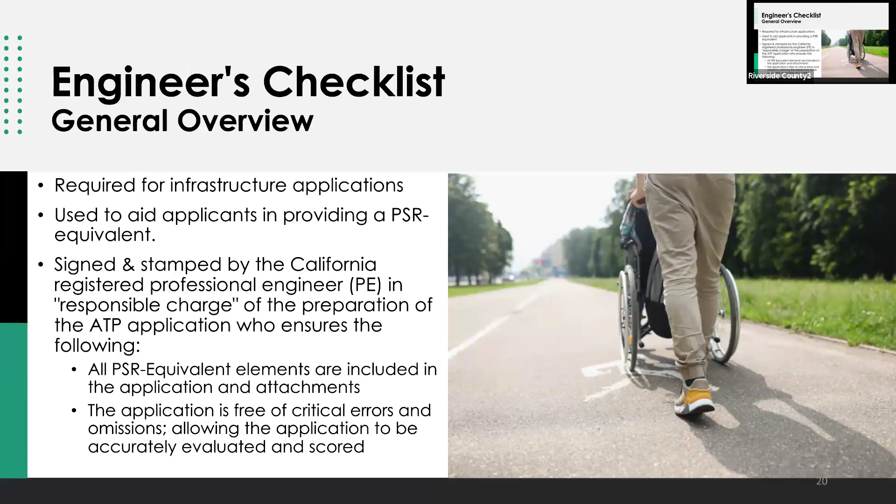The checklist verifies that the application includes all PSR equivalent documents in the infrastructure application. It also helps applicants prepare a complete PSR equivalent submittal. The documents must be signed and stamped by a California registered engineer. The checklist ensures that all PSR equivalent elements are included and the application is free of critical errors and omissions, and the reviewers can score the project accurately without missing information. Next slide, please.

The PE should verify the following information is correct and consistent: 1, the project location map; 2, the project layout plan; 3, the cross-section; 4, the project estimate; 5, the crash and safety data and countermeasures; 6, the project schedule, funding, and programming requests; 7, the warrant study and guidance; and then lastly, additional narrative and documents if provided. Next slide, please.

Okay, the project location map is the first PSR equivalent document reviewers see and helps them understand the project. Let's review a couple examples of project location maps. Next slide, please.

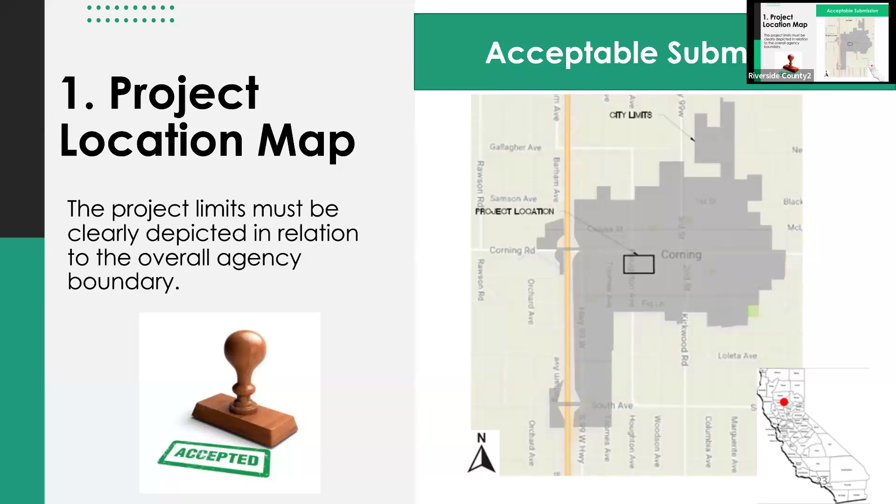This is an example of a legible map showing the project limits of an applicant's jurisdiction. The map does not include unnecessary information. If landmarks were needed for this map, this would be a good location to show those landmarks for reference of the project to, say, the capital of a city or county. Next slide, please.

Here's an example of a project location map showing the project corridor and the overall alignment. The important boundaries and landmarks are displayed in this map. No unnecessary details are shown here. You can see a reference of the location to major cities. Next slide, please.

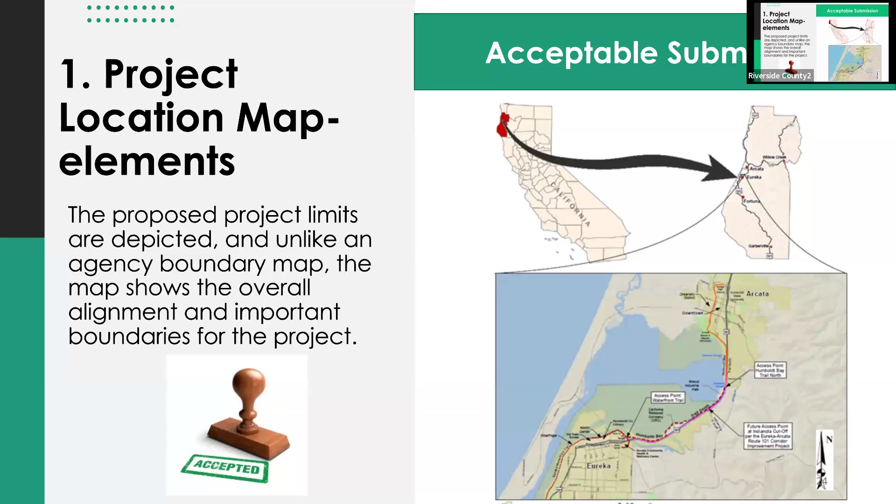This is a clear example showing the work and reference lines and a project alignment. Reviewers can easily see that this project is located on state US 101, and the project is located within the state right of way. Next slide, please.

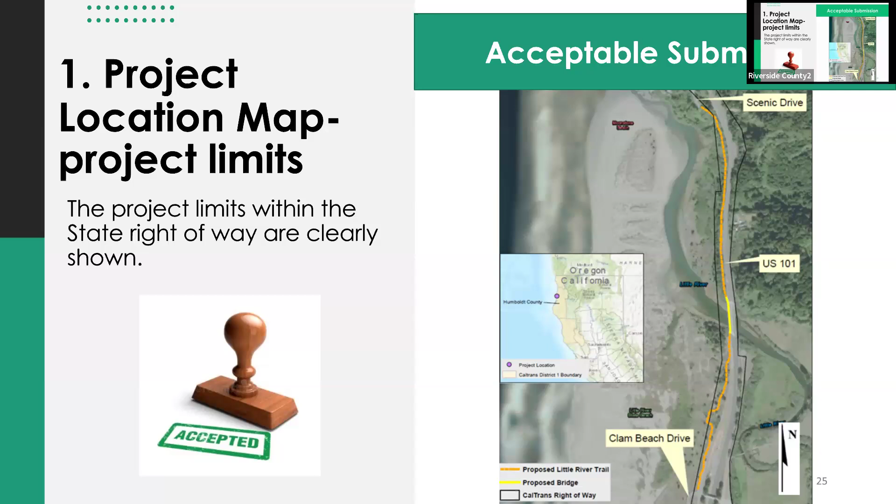In this example, this map fails because it's cluttered, complex, and does not clearly define the boundaries. It just shows a lot of lines, and the legend is crowded with a lot of unnecessary information in reference to the project. Reviewers cannot easily identify where the project is located and the scope of the project. Next slide, please.

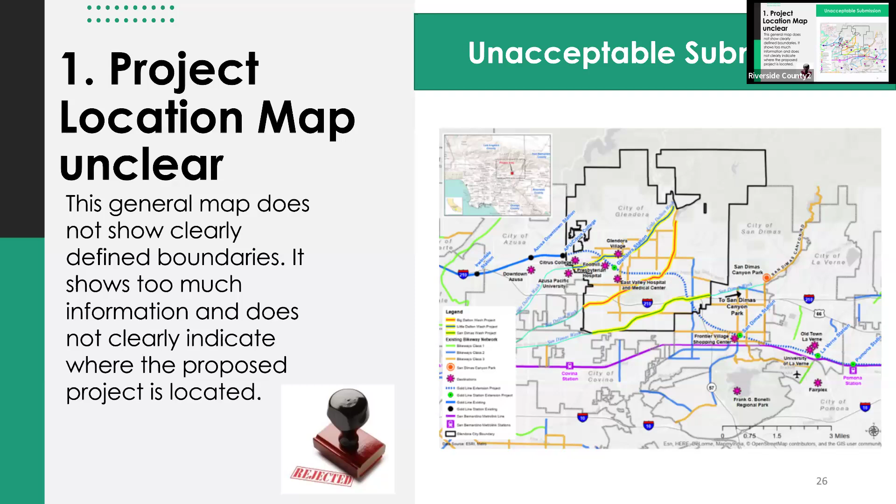Quick tips for creating acceptable project location maps: use clear, unblurry maps, always show project limits and a legend if needed, use simple line weights, avoid cluttered and unnecessary information. The project map should help reviewers better understand the application—back to what Teresa said, that the application include the narrative and the PSR equivalent documents. Next slide, please.

A project layout, a plan, tells reviewers exactly what the project is. Next slide, please. Using the plan alone, evaluators should be able to understand the full scope of work. If you cannot, the rule of thumb is: if you cannot understand the scope, we cannot either. Next slide, please.

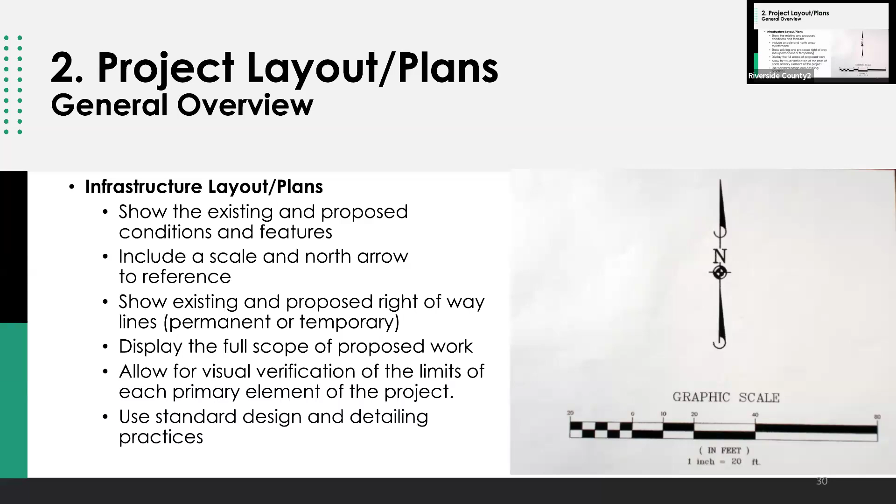The layouts and plans must show the existing and proposed conditions, include a scale and north arrow, clearly depict existing and proposed right-of-ways, display the full scope of work, help define the limits of the primary elements, and use standard design and detailing practices. Next slide, please.

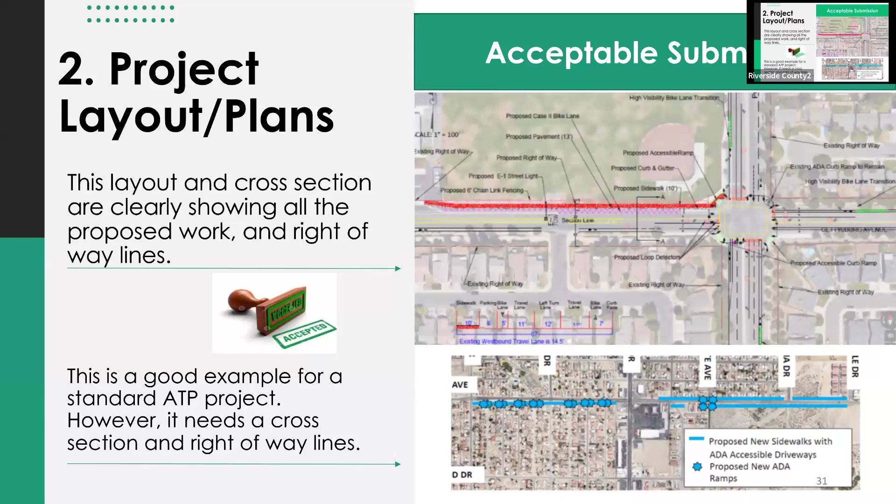This example clearly shows the alignment, cross-section, and right-of-way of a project. It demonstrates a typical layout for an ATP project and includes the appropriate level of detail. The example at the bottom is a good example, but you just need cross-sections and right-of-way lines to clearly depict the improvements for that project. Next slide, please.

Okay, the plan here shows a precise location of this project and how the proposed improvements fit within the right-of-way limits, and clearly displays the state right-of-way. This is important to inform the reviewer and Caltrans staff that a state highway impact assessment form is necessary for this project.

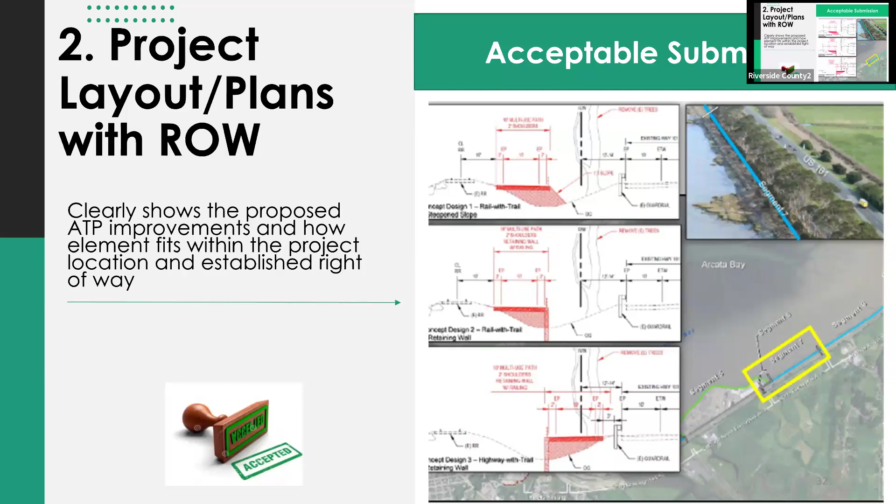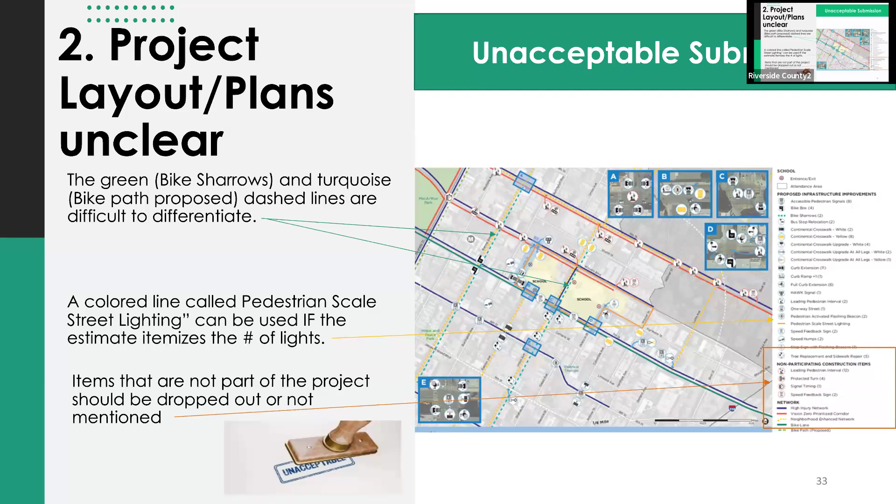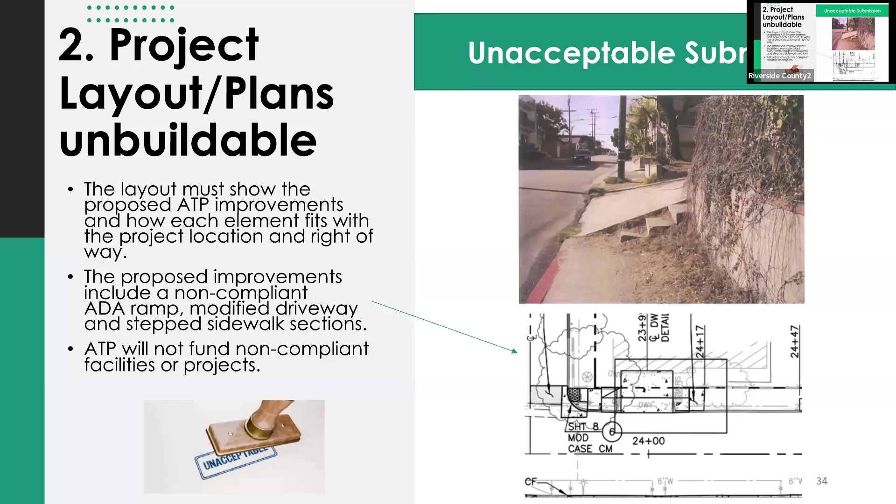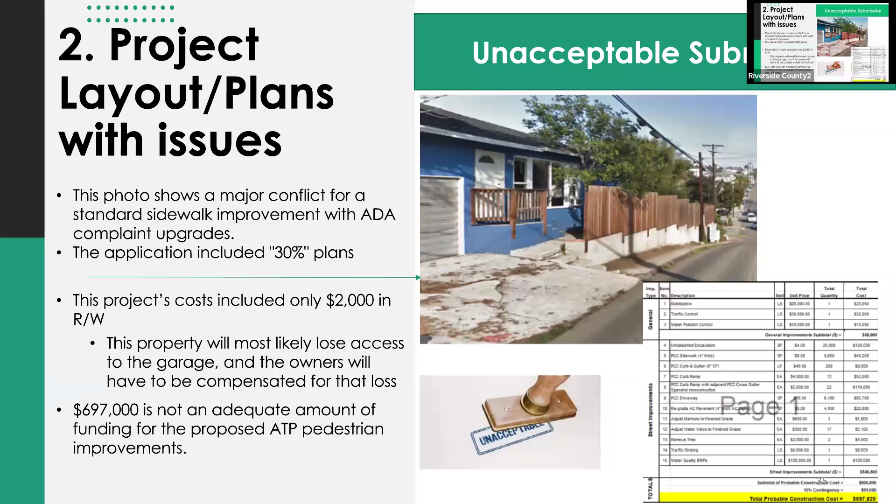So they have $697,000 for this project, and given that the loss of garage access will probably be quite expensive, the estimate is probably pretty low for the actual proposed project.

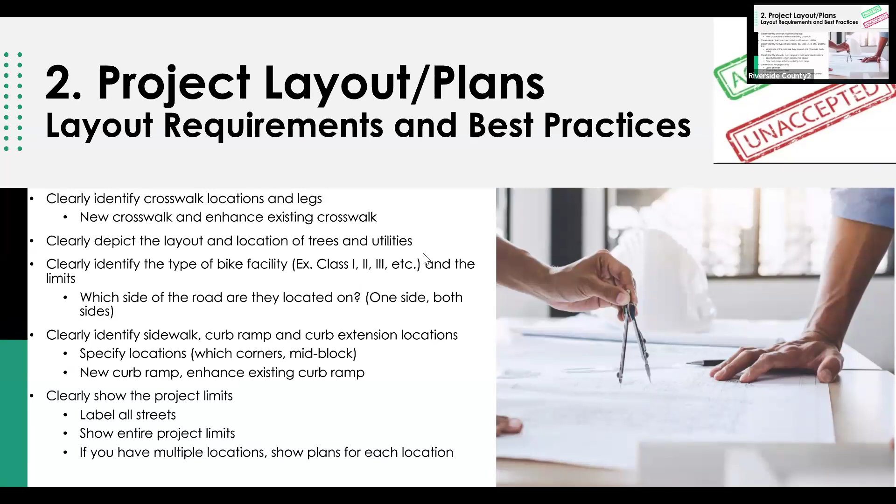Best practices for creating a project layout and plan: clearly label crosswalks and ramp locations, show improvements clearly with consistent symbols, identify the side of the road where improvements occur, display right-of-way lines and any required acquisitions, label streets and utilities when relevant, and provide layouts for each location if multiple segments exist.

Now I'll cover the cross-section requirements. Cross-sections should show improvements and how they fit into the existing corridor. They are essential for feasibility, constructability, and enhance the reviewer's understanding of the proposed project.

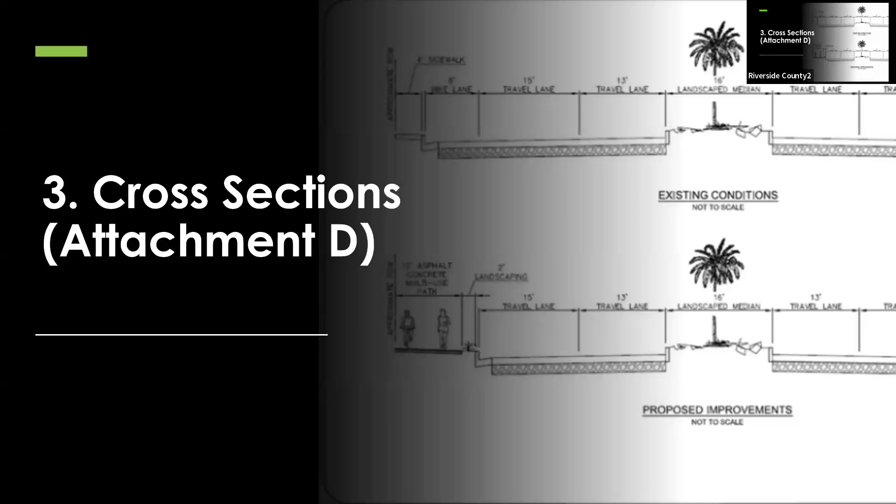Cross-sections must show existing and proposed conditions, match the width shown in the layout and plans, include traffic lanes, shoulders, buffers, and sidewalk widths. Also show side slopes, drainage, and right-of-way considerations, and reflect real field conditions and constraints. They must also depict material depths of the proposed improvements if there are sectional changes throughout the layout.

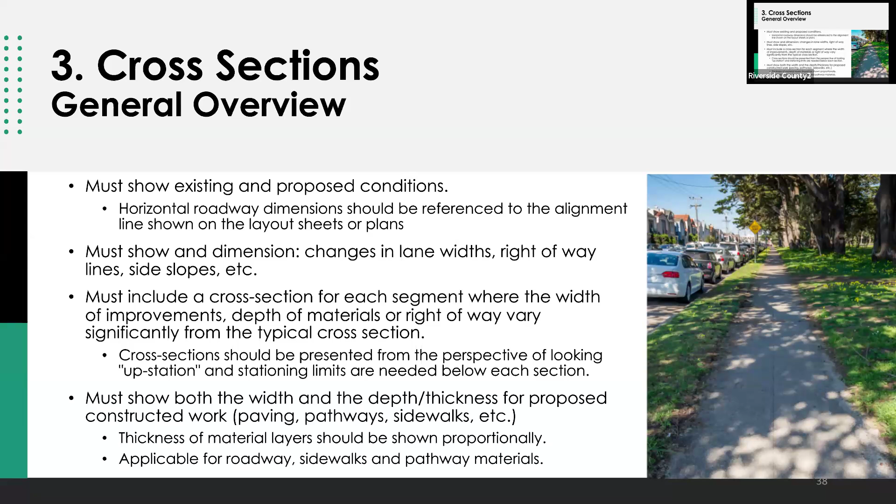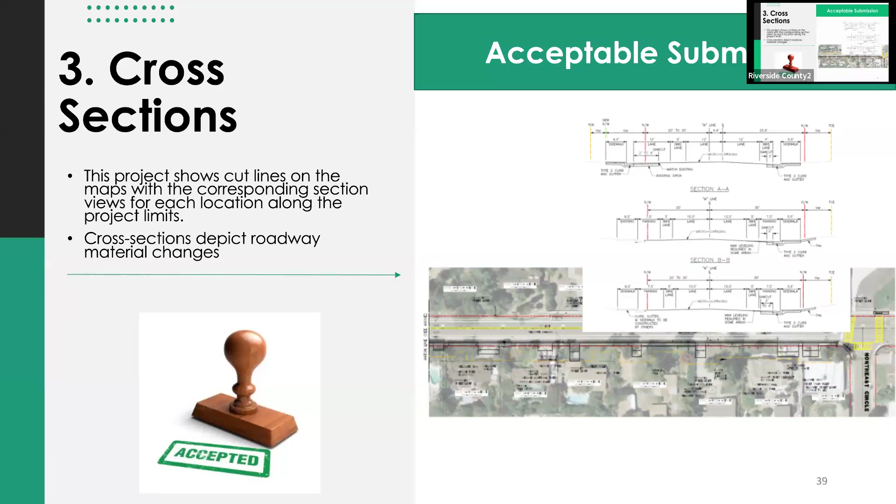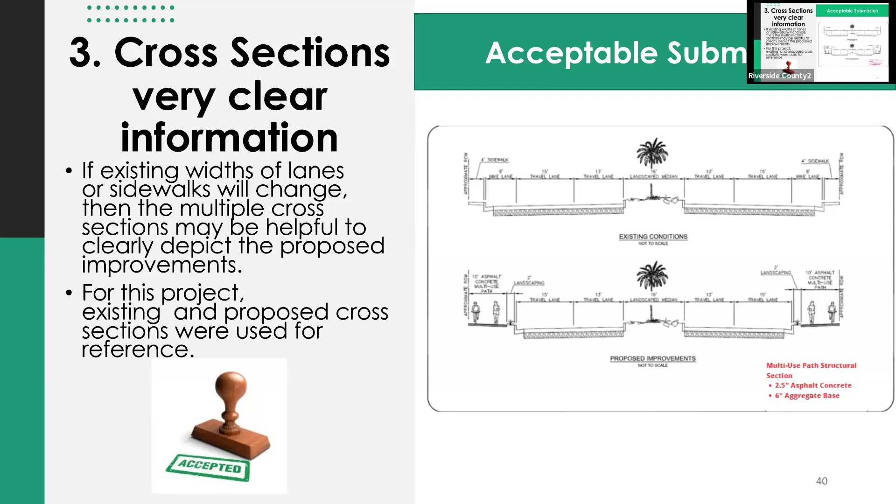This is an example showing separate existing and proposed sections because the sidewalk width has changed. Multiple sections help reviewers better understand the project, the proposed improvements, and existing conditions. This one does a good job showing the before and after, and how the sidewalk would change if the proposed improvement is built.

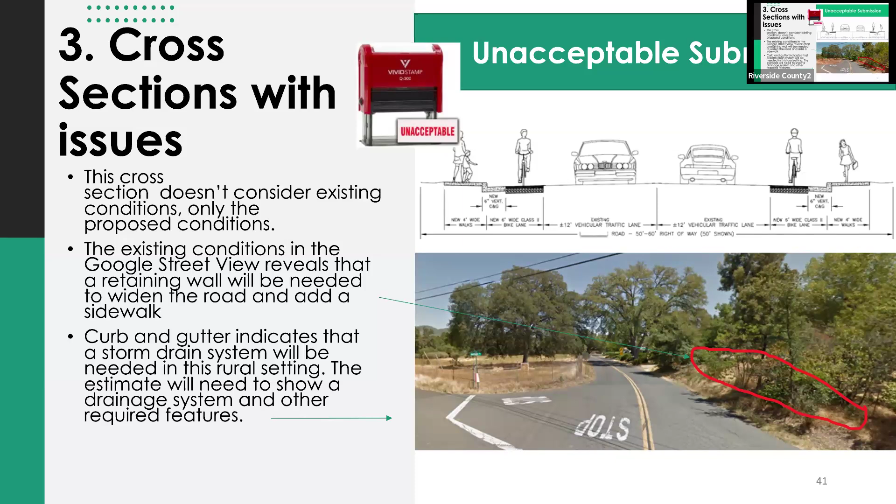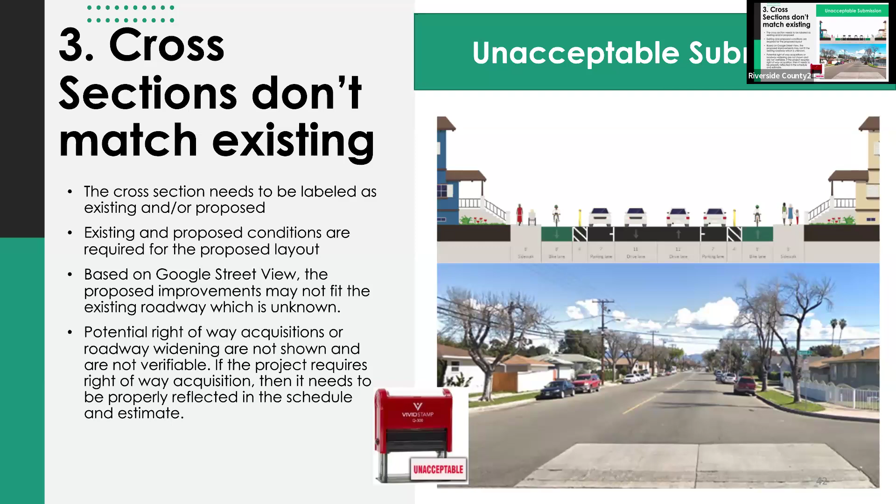And that's what I have for the first part, so I'll pass this over to Cirillo to handle the last attachments.

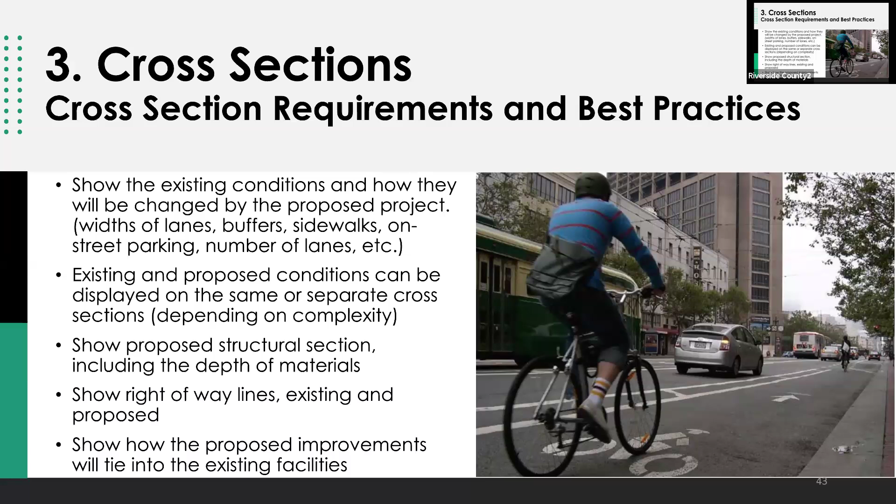I will begin with the project estimate. This is item 4 of the checklist, and in my opinion, is every engineer's favorite task, since they get to take out their calculators and show off their skills. So my goal in the next few slides is to walk you through what is expected and the items to consider during the preparation of the project estimate.

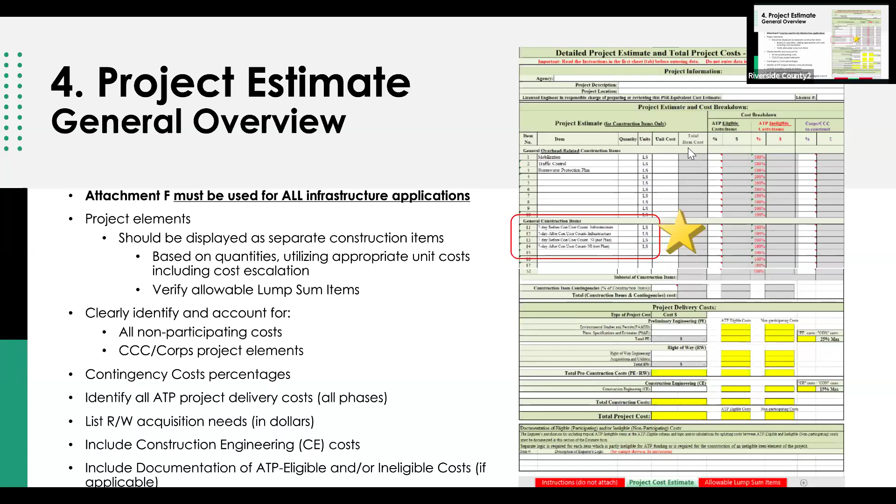Next slide, please. Okay, let's see.

It's a pretty good example of a project estimate that shows itemized construction items with appropriate units, and also segregated non-eligible and eligible costs here based on percentages. You're able to input those percentages in those columns, and it should automatically calculate the ineligible items costs.

This is likely going to get an update to show slash non-participating costs here and have more instructions in the tab about how to show the leveraging funding if they are shown in the eligible slash non-participating columns. Next slide, please.

Okay, so looks like I have the example here about the documentation. Here's an example of documentation for a non-eligible item. For example, roadway paving on the vehicle travel lanes - that type of work is non-eligible for ATP. So you want to make sure that's in the ineligible column. Here's a justification example, how you would document that at the bottom of the estimate. You may use appropriate linear footage or square footage percent-wise, and that's how you would arrive at your cost segregation.

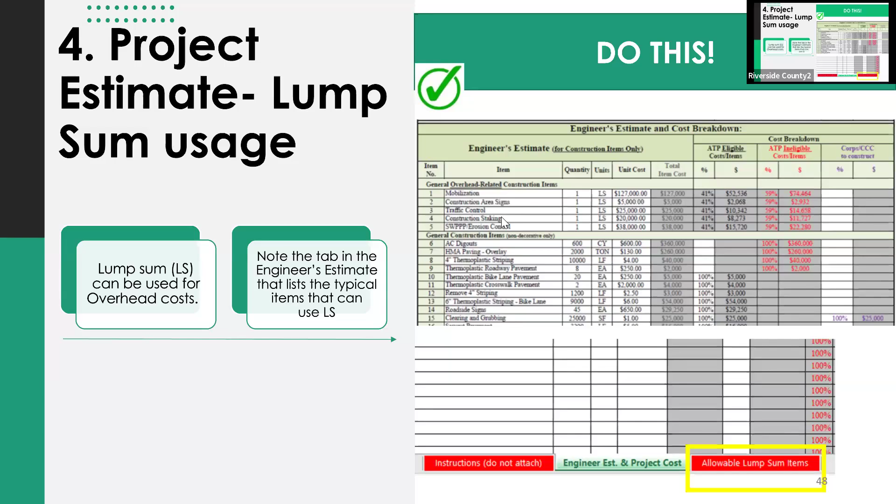Okay, so lump sum items. Another good example of an estimate here, showing the tab I mentioned earlier about the allowable lump sum items. Use that as a reference, please. Next slide, please.

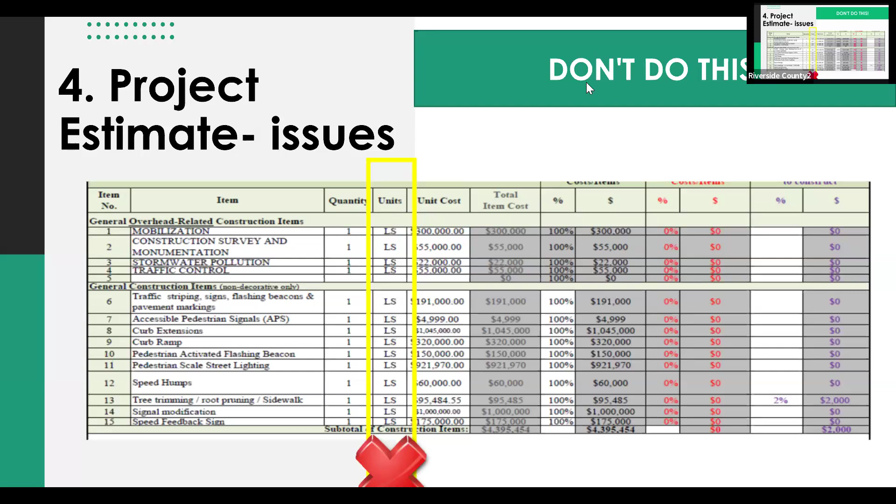A few lessons learned on the project estimate. One thing is, show the cost for each phase regardless of the funding sources. As mentioned earlier, you're able to use the non-participating column for any local funds or other funds to show that. You want to segregate eligible and non-eligible costs. Do not use lump sum for all the items.

Account for NEPA - this is one thing. If your project is $1 million or more in construction costs, account that it may get federal funding. So in your P&ED, you might want to account for support costs or any other costs needed to clear NEPA.

Another thing - railroad mitigation, utility relocation. During this time, it's recommended that you reach out to those stakeholders, take a look at potential costs. You may already have known cost sharing for your utility companies, so account for those utility relocation costs for any cost sharing the agency may have.

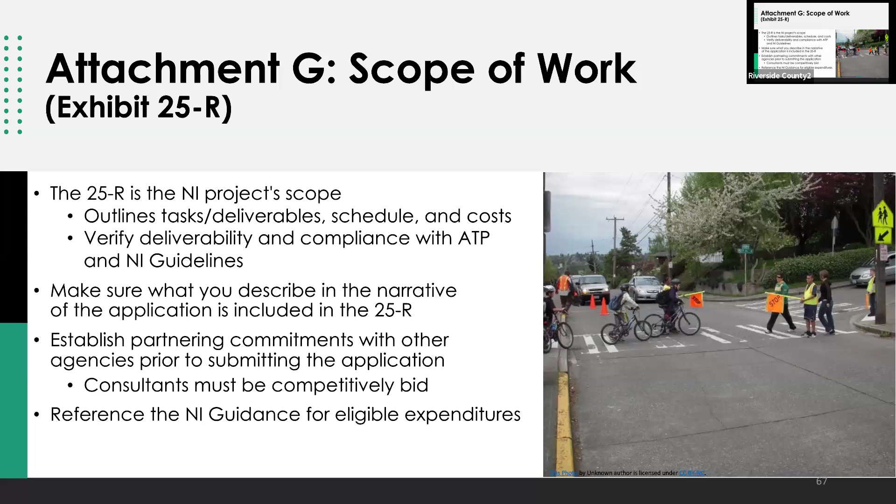The next 3 slides break up the 25R into scope, cost, and schedule, and give some tips on what to include for each. For scope, break up the entire project into overarching tasks, each a different tab on the Excel form. Then, on each task, break it down further into individual activities.

This is where we look for the activities to be consistent with what is described in the narrative. Be detailed and specific. Quantify the number of activities and state tangible deliverables. For example, instead of listing bicycle rodeos as an activity, you should state, conduct 6 bicycle rodeos for 4th and 5th graders, 2 per year, over 3 years of the project. This gives us much more context and displays exactly how it will be delivered.

Make sure you can commit to what you write, as this will be what you're held accountable for. And if you have any more details you want to explain, be sure to list those in the task notes section. Next slide, please.

Now for costs. Ensure the total cost of the 25R matches the PPR and application cover page. Ensure compliance with NI guidelines. It's really important as this is typically where we find issues.

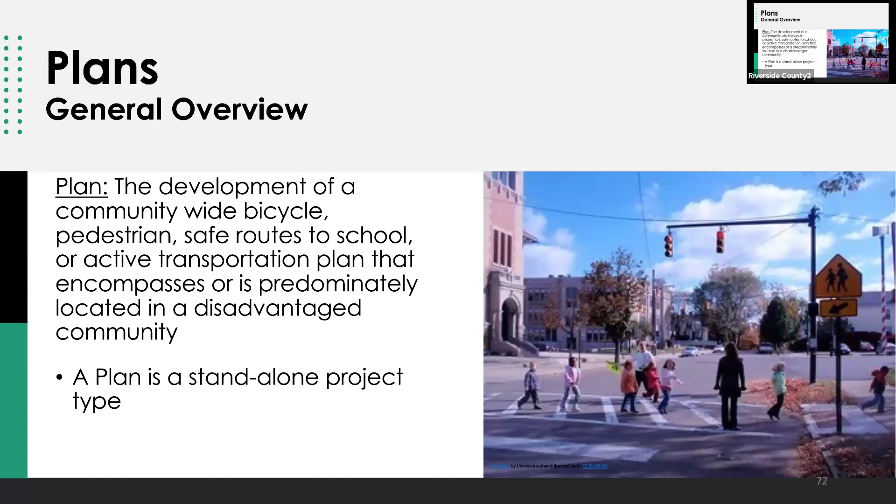We have seen applicants try to combine a plan with NI or a plan with infrastructure, but that is not currently allowed within the ATP. Next slide, please.

Okay, now we'll get into the PSR equivalent details for a plan. The current attachment H of the application is the plan scope of work, called the Exhibit 25 Plan, or 25P. It's an Excel spreadsheet. It may be updated slightly over the next few months, so be sure to get the most recent version when applying for Cycle 8.

The 25P is the plan project scope, which if awarded, the applicant will be accountable for delivering. It's important because it outlines tasks, schedule, and costs associated with the plan development. The 25P also allows us to verify compliance with the ATP guidelines plan components in the current Appendix A. So here's what needs to be included: be sure that what you describe in the narrative of the application is included in the 25P.

Caltrans does cross-check the narrative with the 25P, and we have seen some applications that describe certain activities in the narrative, but when we look at the 25P, they're not listed. For example, community engagement is a big piece of the planning process. In the application question, the applicant describes doing community surveys, tabling at farmers markets and other existing community events, and having an interactive feedback website. However, when we read the 25P, it doesn't list any of this.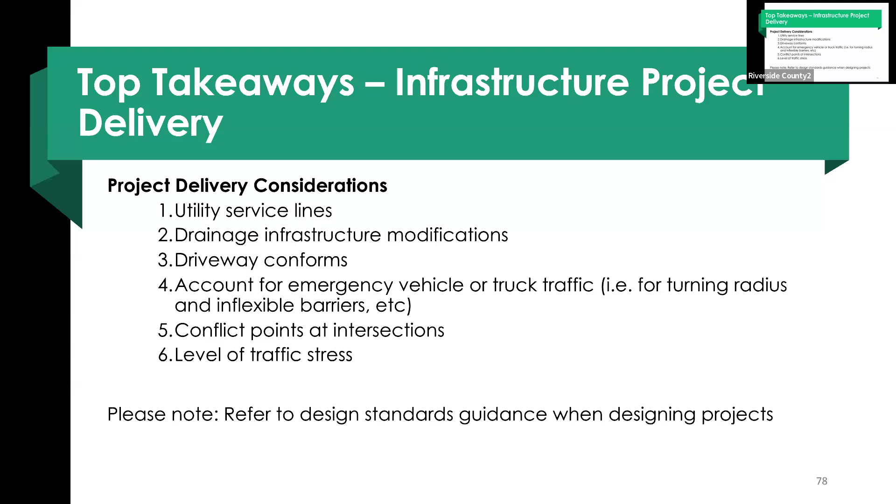Back to you, Ally. Next slide, please. Great, all right.

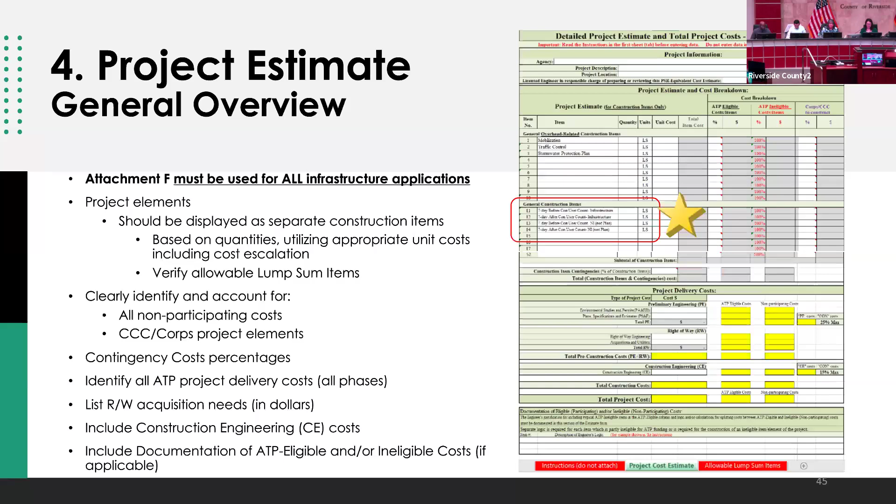Jaden, is there a way to go back to that slide? Yeah, absolutely, give me one second. Just bear with me while we slide back through here. I think it may be slide 45 or 46. Here's 45. Okay, maybe 46 would be better.

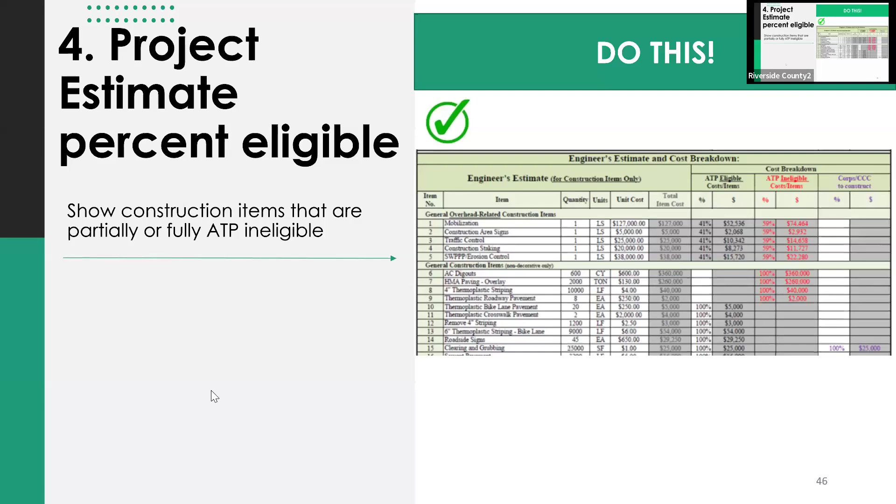So this is an example, hopefully you're able to see the screen here. Just to the right of the ATP ineligible column, in purple, you would put a percent of what the conservation corps is able to do. So for this example, they're able to do the clearing and grubbing, so you put 100% there.

During application, while you're finalizing, there's an instruction to reach out to your corps, and sometimes they will let you know what type of activity they're able to do, and sometimes they're unable to say. It depends on how your coordination goes. I recommend sending a draft of this estimate to them and see what type of work they're able to do. If they provide you with the work, just clarify and put the percentage there of the item they're able to participate in, and that's it. If they say they can perform the work but can't confirm it, it's okay to not include that right now, but it is expected to be reviewed in the application. If it says they can participate and then you do not utilize them in construction, that would be a question.

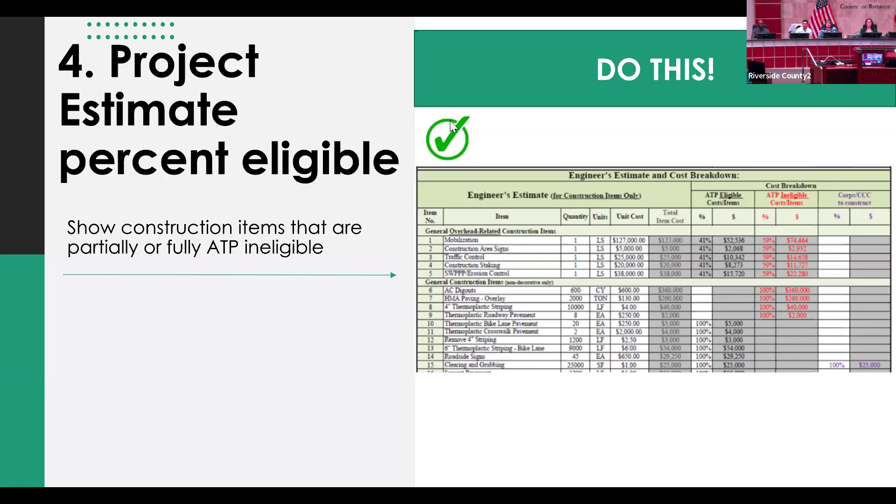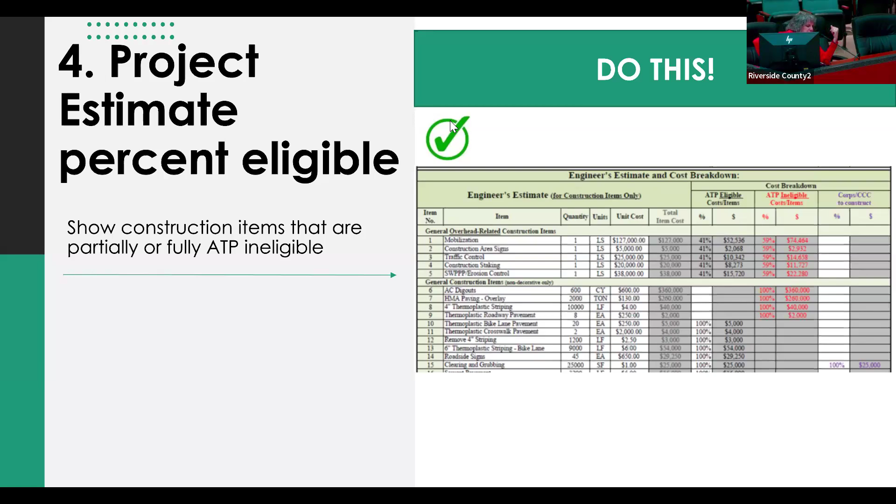I was just going to say, along with what Anya said—sometimes, and this is more of an intangible thing in the scoring, if a project has done environmental and design, sometimes in the application they can describe it more, because they're further along. So in a way, for some evaluators, they can just see it more, which may lead to a higher score. May or may not.

Thank you, Lori. Looks like we have one additional comment in the room.

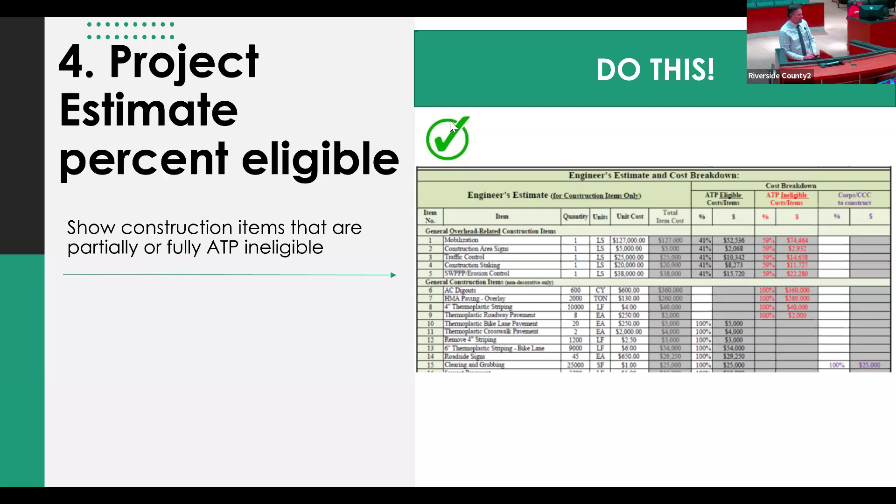I was hoping you could elaborate on slide 62, where you showed the schedule from PA&ED, PS&E, right of way, through construction. One situation I found myself in on a few projects is in the PA&ED phase, where we're doing the environmental documentation and getting permits established. There's often a level of design, preliminary engineering required in that phase to fully document impacts and your project footprint. Would you talk about what level of preliminary engineering, reasonable costs, or what might trigger a red flag during a review? I found myself in a position where there wasn't enough PE put on there, and we're scrambling to find an extra few hundred thousand dollars to complete the necessary engineering studies needed to get there.

That's a tough one. Sometimes you don't fully see ahead of time the impacts or constraints on that location. So number one, assume federal funding, about 1 million more, because that will add support costs off the bat.